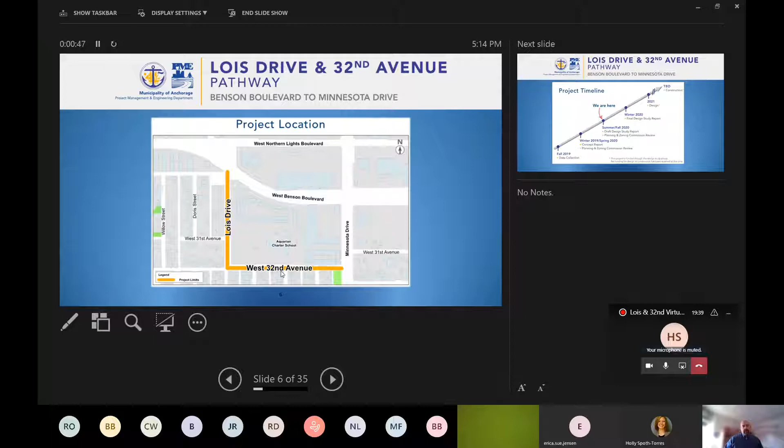So we are currently preparing the draft design study report for the project, and that's really the detailed look at all the issues and challenges that are on the corridor, and where we develop alternatives for addressing the issues and what we want to build along the roadway.

So as we progress, we'll submit the draft design study report with a recommended alternative to the Planning and Zoning Commission for their review and approval. There'll be a public hearing associated with that. Once we receive comments from them, we'll move forward to the final design study report with a recommended alternative. That report will be used to prepare the design, and then which would go forward into construction.

There is not any funding currently for design or construction, so once we have the final design study report done, the project will sit until they can get a little bit more funding.

So the project, what's the purpose and its need? Really, the purpose driving the project is to improve non-motorized connectivity on both Lois Drive and West 32nd Avenue. We need the project because there's a lot of pedestrian and bicycle traffic along the corridor, and the non-motorized facilities are missing, discontinuous, and they're falling apart. And you look at the roadway and drainage systems, they're also in poor condition. Lois Drive was listed as the Spenard Community Council's highest priority capital project for 2019, so we're trying to take that forward.

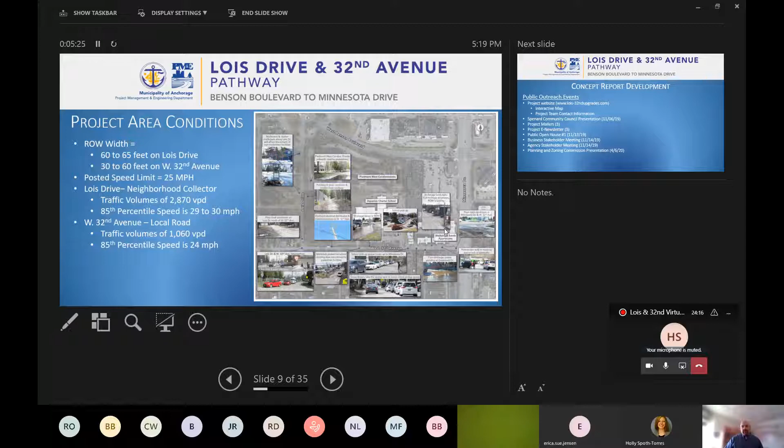Other issues: we have pedestrian crossings to the school, but we don't have any pedestrian facilities on either side at this location. We have more drainage issues and parking and queuing associated with the Aquarian Charter School, as well as limited right-of-way along the section of roadway in front of the school.

As part of the project, the first thing we did back in 2019 was develop a concept report, ahead of the design study report. The concept report involved going out and asking members of the public what they felt were the issues on the roadway and what they'd like us to solve if we moved forward with the design.

As part of that preparation, we sent out a couple mailers and presented the project to the community council. We had a public open house back in November 2019, which included members of the general public and business stakeholders — primarily folks from the Aquarian Charter School who showed up to discuss the project.

We also met with various agencies — different municipal agencies, state agencies, DOT — and utility companies. So we met with fire, traffic, and others.

We then submitted the concept report to the Planning and Zoning Commission, and they held a public hearing on April 6th of this year — just before COVID was getting going.

So here's what we heard while developing the concept report — just the main items. There's a full list of comments received published on the project website, but this is just a summary.

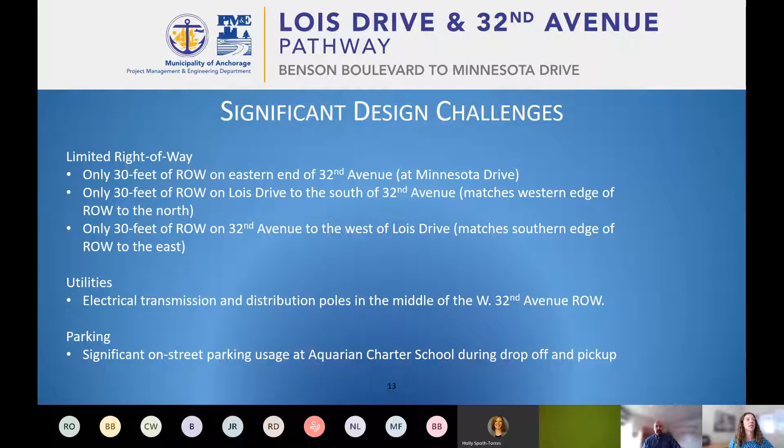Thank you. So like Matt mentioned, we came up with 4 alternatives that we evaluated further in terms of the analysis and their impacts. Let me advance to where I haven't advanced my slides yet - there we go. Alternative 1 is fully compliant with the Municipal Code Title 21 as well as the Design Criteria Manual, which includes specifically 7 feet wide snow storage buffers behind the curb. And I have pictures of all these coming up next, so you don't have to look at all the text too long.

Alternative 2 narrows those buffers to keep the cross-section within the available public right-of-way. Alternative 3 removes the buffers and shifts the roadway to minimize impacts to adjacent properties, utility, and other features. Alternative 4 is a pathway-only alternative. It really minimizes the impact and reduces construction costs.

For the intersection of Lois and 32nd, we developed 3 alternatives. 2 of them shift it to line up the right-of-way on either side, and the third one looks at a roundabout. Like Matt mentioned, these can be mixed and matched, so we'll go through quite a few of them, each dependent on the roadway.

For Lois Drive, Alternative 1 includes the full 7-foot buffers between the back of curb and the sidewalk. This is looking north on Lois. On the Aquarian Charter School side, you would have a 10-foot pathway, and on the west side, a 5-foot sidewalk. You have 11-foot drive lanes and 3.5-foot shoulders. You'd also have street lighting.

This does require right-of-way acquisition. We have 60 to 65 feet of right-of-way, but our improvements go for a full 70 feet. So this would require right-of-way acquisition for the full length of the corridor. It does meet all Title 21 code requirements as well as design criteria requirements, so it would not require any variances or waivers.

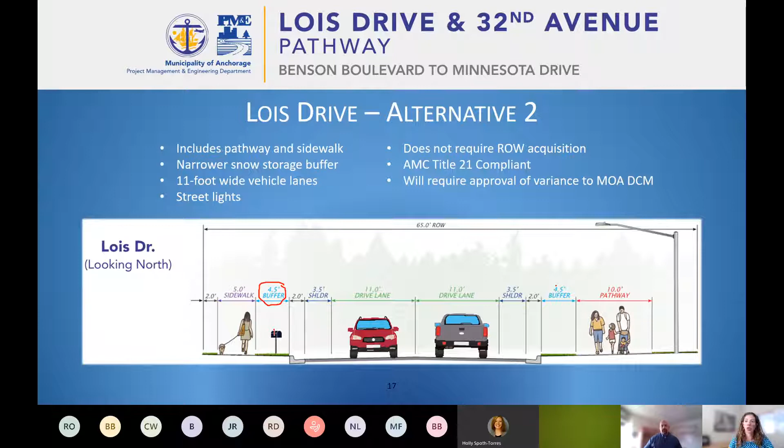Alternative 2, again, this section down here is like we are looking north. Exact same as alternative 1, just reduced buffers in these areas here and here.

Again, infrastructure that is impacted by the improvements, say a fire hydrant or a light pole, or even the sign from Minnesota Commons, would be relocated and placed outside of the improvements.

We put it in a little median in between the travel lanes, which is not ideal. You don't like a tall, expensive transmission pole located between travel lanes, but it does prevent it from requiring relocation.

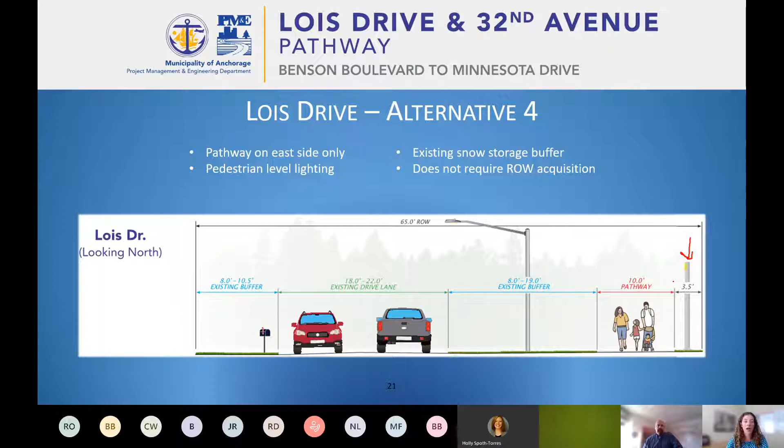A pathway is constructed on the east side. We would also add pathway lighting to enhance both pedestrian safety and comfort. It does not require right-of-way acquisition because we placed the pathway so that we wouldn't need to.

Another factor with 32nd is, of course, the large transmission poles. So we came up with various alternatives that impacted transmission poles and distribution poles only, and then none. Alternative 1 is the alternative that is fully compliant with Title 21 and the Design Criteria Manual. It would require a lot of right-of-way acquisition in both the 60-foot area as well as the 30-foot area, because we had to add a couple of things, such as the curbed median in the center to accommodate the transmission poles.

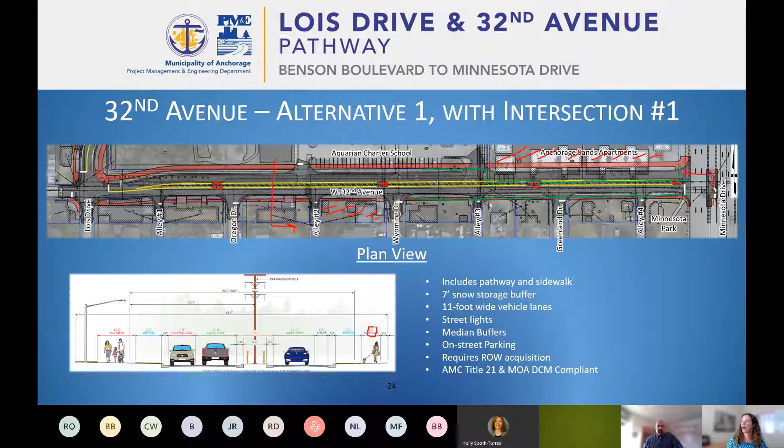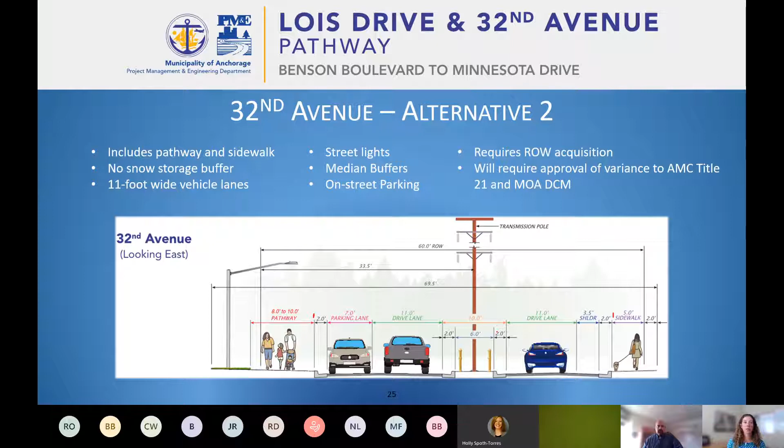Alternative 2 aims to reduce the impacts but still meet the full roadway requirements in terms of drive lanes, parking lanes, and pedestrian facilities. The way we were able to reduce the impact was to get rid of the buffers between the back of curb and the pedestrian facilities. We're still providing a parking lane, drive lanes, a shoulder when there's no parking lane, roadway lighting, storm drain improvements, etc. We also aimed with this one to keep the transmission poles and the distribution poles, I'll show you that on the next slide, through the use of a curbed median in the center.

So again, here's our section, and we are looking east. The sidewalk is on the south side. The curbed median, as you can see, runs the majority of the roadway.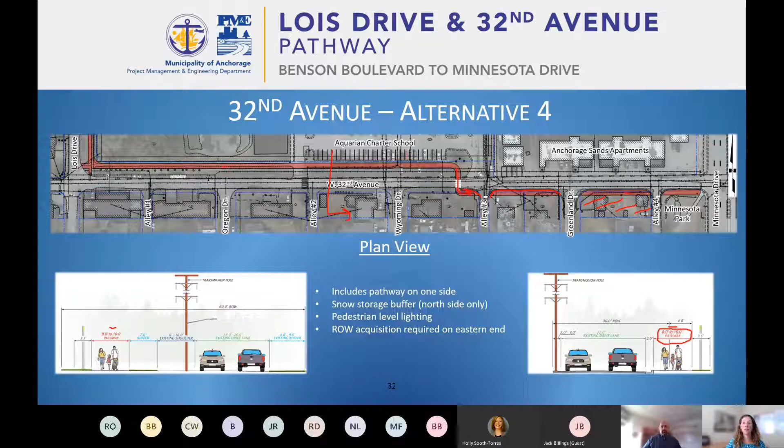Next steps: we will incorporate all the stakeholder comments received to date through the concept report, the first open house, the public open houses, the stakeholder open houses and business meetings. We will identify a preferred alternative. That's what the DSR's intent is, to analyze all the alternatives and actually identify a preferred one.

We will then present the draft design study report to both MOA Planning and Zoning Commission as a public hearing. The reason it's a public hearing is because we do anticipate that we will be requesting variances. Following that, we will incorporate comments from the municipality's review as well as the Planning and Zoning Commission's review into a final design study report and route that for signatures and approval by Municipality of Anchorage, Project Management and Engineering, and Traffic departments. Like Matt mentioned earlier, the design is not currently funded.

Once that is funded, we will move forward to implement the preferred alternative identified in the design study report and move forward with the 65% and 95% designs, as well as continue our public involvement process, which includes public meetings.

I'll now hand it back to Holly, who will tell you a little bit about how to stay involved and submit questions, and then I will be available to answer questions as well.

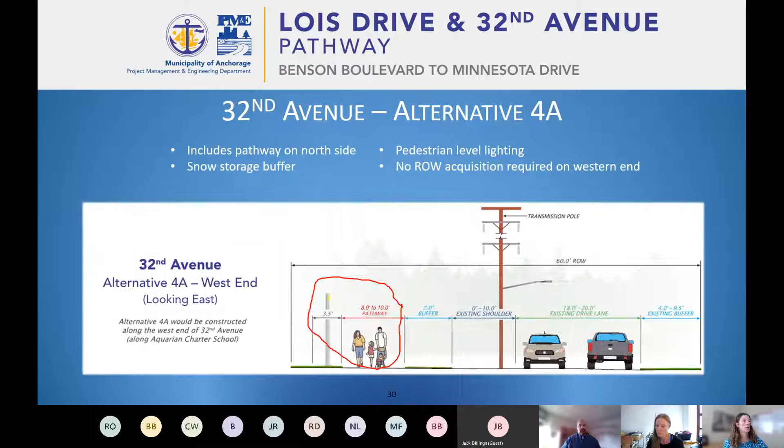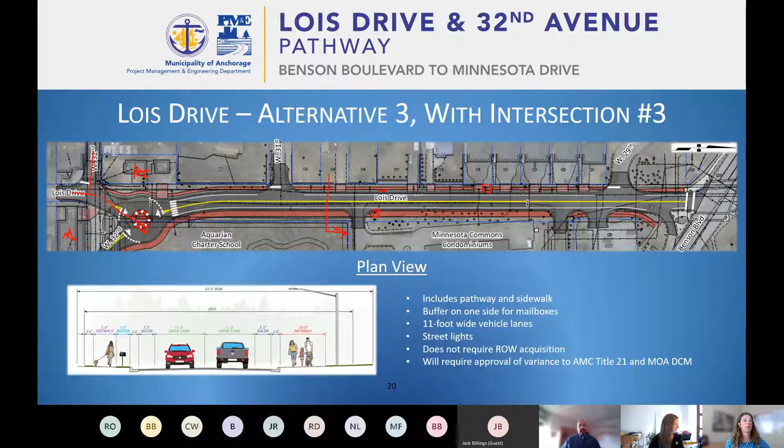30 seconds. Lois, there we go. That's a really great question. That was one of the other goals of the roundabout, so thank you for pointing that out.

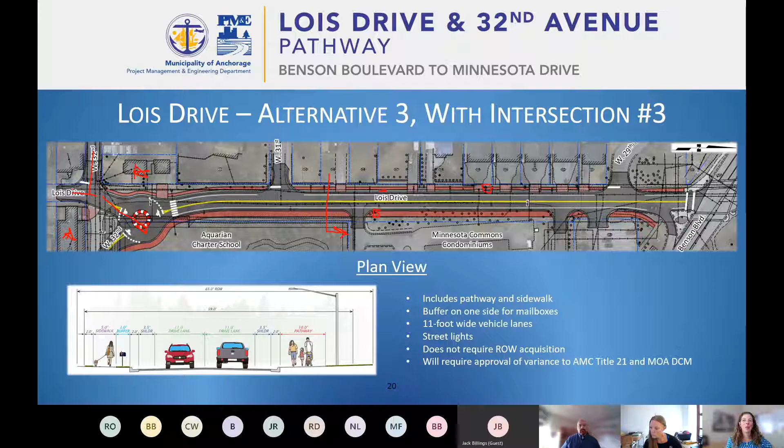Let me get my pointer back. One of the goals, in addition to saving these properties, was not relocating the transmission pole, which is located right there. So it is close, but we would protect it with bollards, as we would on all the alternatives that protect the transmission poles behind the curb. We would put protective bollards. So the roundabout does not require relocation of the transmission pole at this intersection.

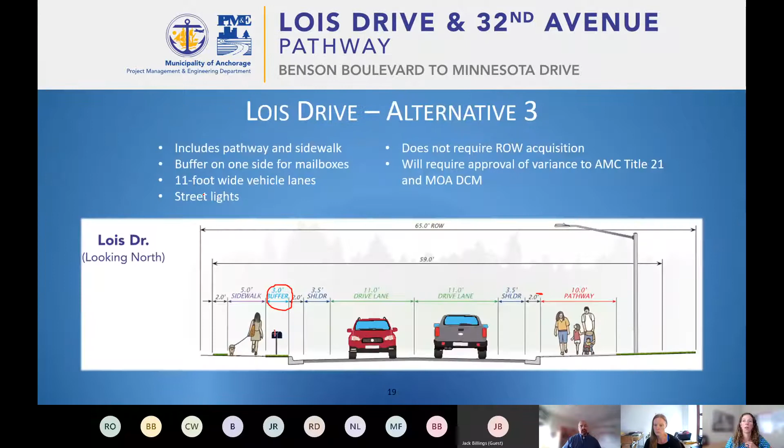Jill had a follow-up question, I'll get to her comment to Representative Drummond in a moment. Jill asks, how would the roundabout work with alternative 2? That would have to be looked at further in design, we did not analyze that. I'm assuming you mean roundabout with roadway alternative 2, correct? It would work, we just didn't show it that way, just honestly for ease of graphic representation. But any of these intersections can be interchanged with any of the roadway alternatives. So it would work, it would just look different.

I'll just say it out loud, everybody can see it, but remind electric utilities that we've been paying undergrounding fees for years, exclamation point. Okay.

Another comment from Jill: there are no right-of-way funds expected, right? Correct. Currently, the next process is once we have a preferred alternative, which would include expected costs for acquisition and right-of-way. Depending on those costs, right-of-way funding would either come separately - Brooke or Russ, chime in if I'm misspeaking - it would come separately if they are significant costs, for example if they include relocation costs. Those are often funded separately ahead of the project. If they're minor costs, like drainage easements or slope easements, those are normally funded with the project. But Jill, you are correct, there are currently no design, right-of-way, or construction funds.

I don't know if I answered that correctly, because you asked if they're expected, and I answered as to whether or not they're currently available. So please let me know if I did not answer that correctly.

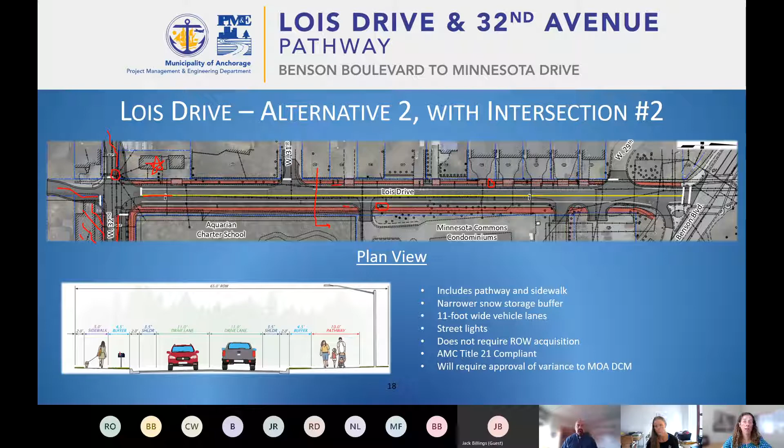Good question, because this would not have necessarily been a roadway in which our first intersection alternative was a roundabout. It seems like a pretty minor intersection. However, because of the constraints, the roundabout actually gave us the best flexibility, let me move to that slide, in moving the intersection, which is truly what we're looking at with this one.

The associated traffic volumes do not say put a roundabout here, but the other factors of this project, the parcels, the properties, the transmission pole, the fact that on the northeast corner we have land I wouldn't call undeveloped since it's being used by Aquarian Charter School, but it's undeveloped in the sense that nobody lives there, nobody's home is there, nobody's transmission pole is there. So the roundabout came about as an alternative to reduce impacts to existing infrastructure and constraints at this intersection.

Did that answer your question, Sherry? It did, thank you very much. Okay.

I know silence is awkward and weird, but I just like to give people time to think about things. So this is where we'd normally be milling about a room, eating cookies, that's why we have cookies and snacks, and hugging each other. Things we can't do now.